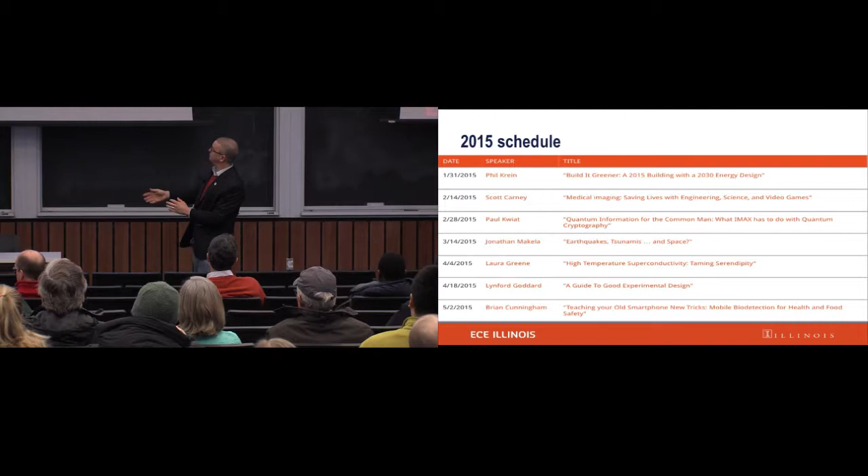we have a photonics or optics theme. This was intentional this year. 2015 is the UNESCO designated International Year of Light. It's a very exciting time for people like me who have made their careers working with various forms of light. It is also, I think, broadly an exciting time in science. It's the sesquicentennial of the publication of the paper that really first explained that light is very closely related to electricity and magnetism. And so it's a great year.

It's an exciting time. I think we've got an amazing slate of speakers, and I'd like to thank them first of all.

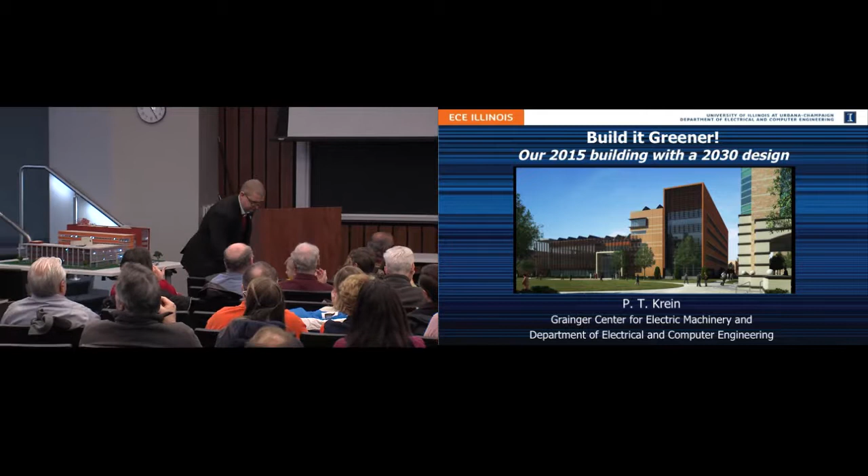All right, good morning. Welcome, everybody. I'm glad to see so many people here. He's taken away my things, but I wanted to tell you what was on those displays.

On the left one, we've been taking a snapshot every 15 minutes since January 1st, 2008 of this particular site. We have this tremendous time lapse, which probably I'm the only person who's not bored looking at. But it's fascinating to watch the holes get dug and all the things moved around, the steel going up, and all the rest of it.

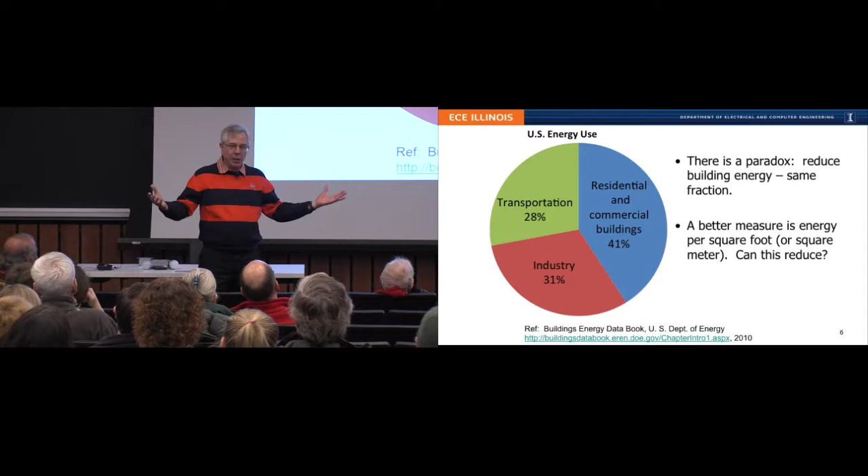What we want to do is make it smaller, right? We want to make the whole circle smaller, but we can't really mess with the fractions. So when people in Congress say, oh, 41% of energy goes to buildings, we have to do something. Well, whatever we do, it'll still be the same number. So we got to go after the right problem.

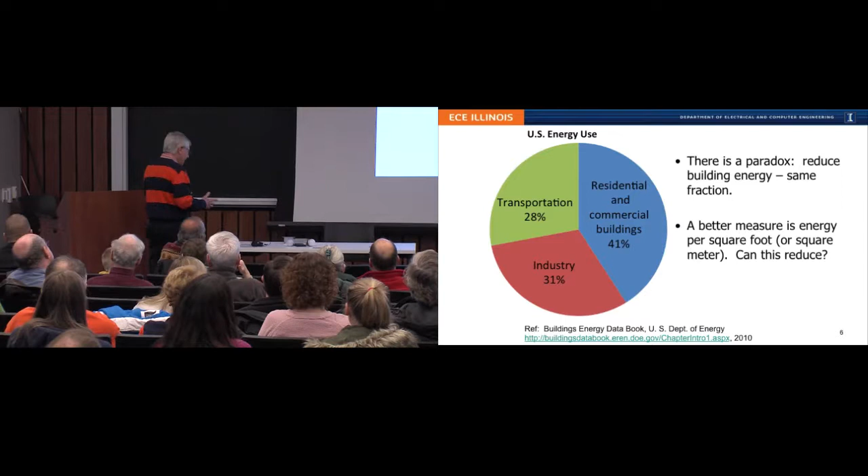The better measure is how much energy per square foot, or per square meter, does a building actually use? This building is spectacular, at least I think so. The data are still coming in, but it's looking very promising. Well, we think of buildings as things that architects do, and maybe construction companies.

What do engineers do in buildings? Well, first of all, engineers are the ones who have to make the choices about everything. I mean the engineers have to figure out how deep the hole gets dug, whether the dirt will actually hold up the building, how big the steel is going to be, and whether we can make that steel vertical enough that it'll stand up when we're done. They have to make sure that when the wind blows, the building doesn't tilt over, and so on.

They have to design it. They have to make sure it works. They have to make sure it'll be safe. Many times we have to test things if we're not quite sure, to make sure they really will work the right way. And on top of this, buildings have lots of codes and rules and regulations and safety stuff. That's all great. Now the construction people come and make the building.

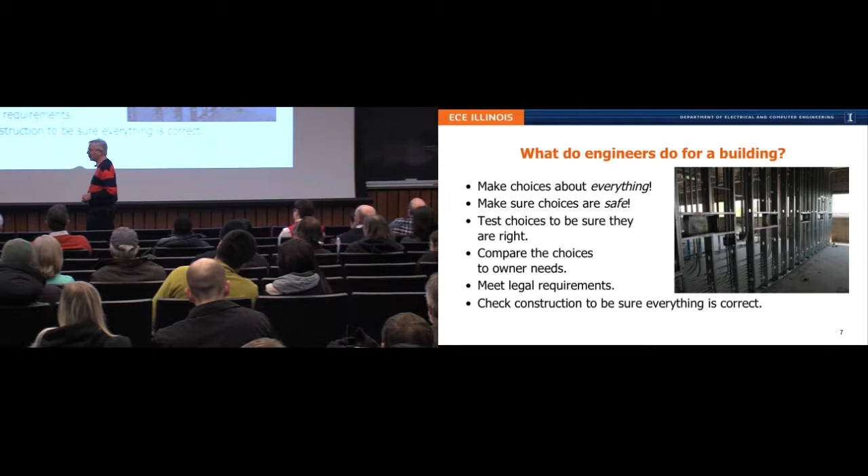The engineers and the architects too are responsible to make sure they do that right. This building is a great case in point. We had a wonderful design, and we said, boy, if they can just build it exactly as intended, it'll be great. Well, you know, 95% of the time that's true. The other 5% we're still working on, but it's okay. It's getting better all the time.

Now, one of the things that drives the things we do in low energy buildings is indeed related to students. Many years ago, the Department of Energy, pushed by a lot of people, said we want to have some sustainability goals. We really want to have buildings that use much less energy. And they put together something called the Solar Decathlon Challenge.

But anyway, their job was to figure out how to build houses, and those are sitting on the National Mall in Washington, D.C., that basically produce more energy than they consume.

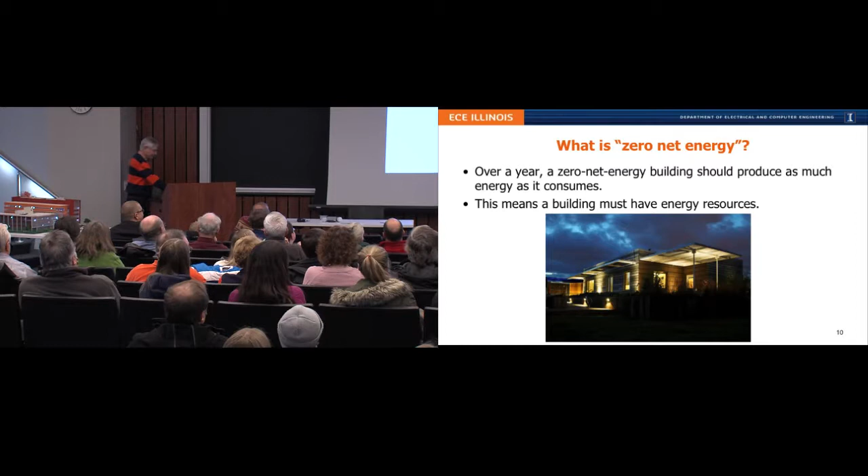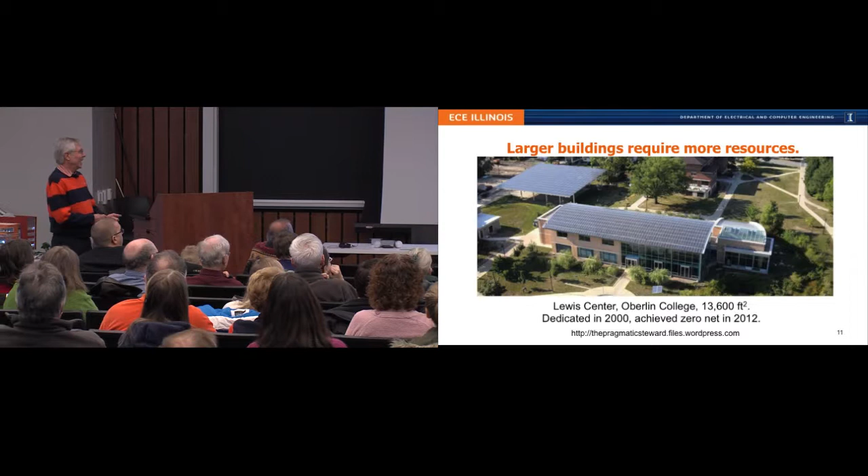Here is a building that does that. It's one of the first significant buildings in the United States that did it. It's in Oberlin, Ohio. Give you some perspective, right? 13,600 square feet. I know there's at least one residence in Champaign County that's that big. It's bigger than this room, not a lot, so it's not a really big building. And they put it together in 2000.

They talked about how wonderful it was and how little energy it used. Took them until 2012 to actually get to net zero energy. And if you look closely, you'll notice that what they had to do was cover the whole thing with solar panels and cover this parking lot with solar panels, and there's a little bit of other stuff in there you can't see. So it gives us some perspective on how these things really work. By the way, this building behind it is just a big house, so it gives you, again, some scale on how big that building is.

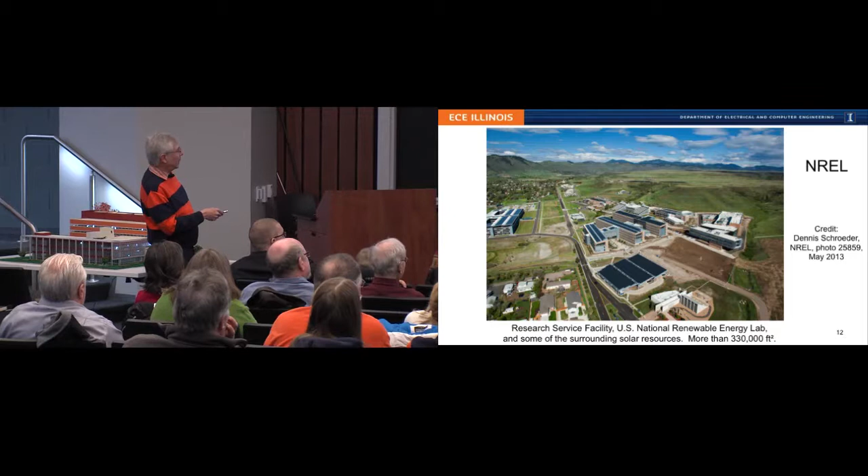And it is zero net energy. Well, because this parking lot's covered with solar, and this parking lot's covered with solar, and this building's covered very densely with solar. Yeah, that's what you have to do to make it work. It's okay, right? It generates more energy than it consumes. So that building is tremendous in terms of its energy capability. If you're ever out there, go visit it. But this is hard, okay? It's not easy to do this.

Why? Okay, first thing everybody wants to know is, well, how much is that going to cost me? I want a low energy building. What are you going to charge me for that? And given that I do that, how much is it going to cost to actually run the thing? Is it going to be more expensive to operate because it's got complicated things in it? The biggest problem in the United States is that most large buildings aren't owned by the people who actually use it and live in it. So why should the landlord spend lots of money on a fancy energy building when they're not paying the energy bill? The tenant's paying the energy bill.

So, you know, what's in it for me as the building owner? Now in some parts of the country, certain places in California, I can command a premium rent because I've got a low energy building and it works better. That's okay. Illinois, well, not so much, right? And even here, we've got lots of houses that are just leased as well. Actually, I'm pretty impressed with these people. They re-sided their house and really fixed it up. So that owner clearly cares.

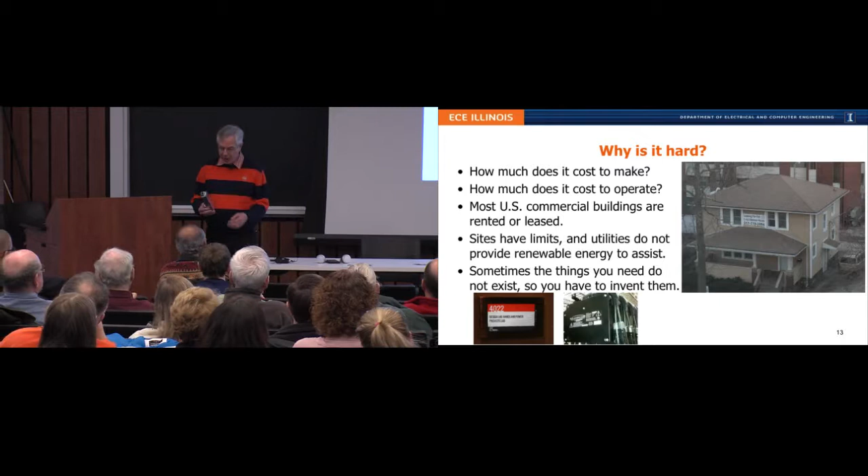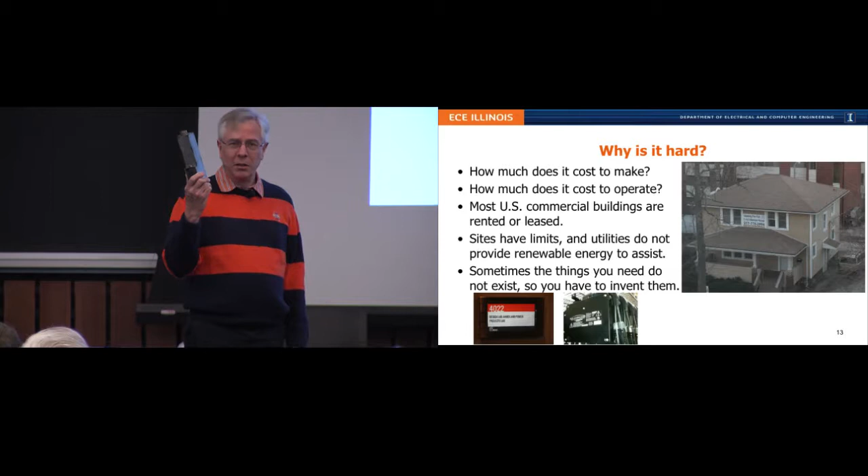Bigger problem, right? Sometimes the things you need don't exist, you have to invent them. Not everything we invent is a fancy app or some wonderful, complicated computer. A lot of them are pretty mundane. For example, our contractor said, well, we can't figure out how to make the electrical work in this particular kind of wall. And I said, why don't we just build a box that'll work? Oh, we can do that? Okay. Turned out nobody had done this before, so we have a patent on it. Sounds kind of silly, but it's true.

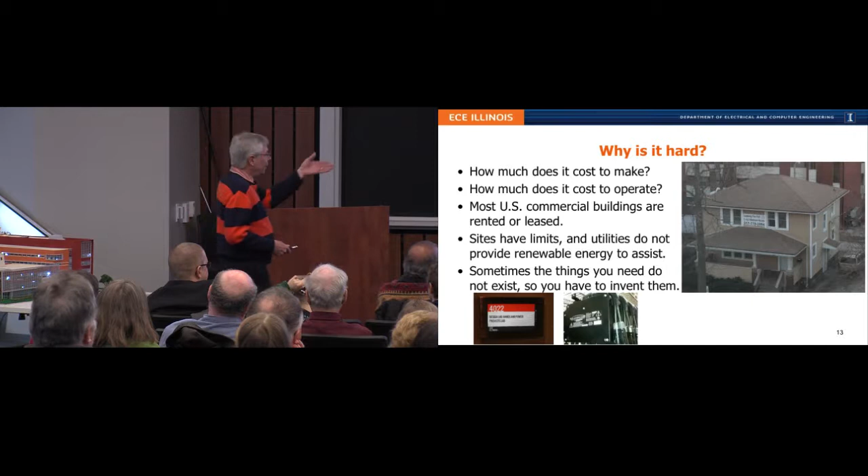See that thing down in the lower left here? Maybe you noticed that display as you walked in the door. Turns out those didn't exist either, so we had to invent them. We didn't invent the software, somebody has that already, but we invented the way to mount it on the wall, the box to set it up in, the fact that it's really secure. Three graduate students with a crowbar would probably spend three hours trying to rip it off there. They would eventually do it, but it would take a while.

And we also had to invent these devices that will convert solar energy, which will be used on the building here pretty soon in the next few weeks as they start installing that. So, you know, if the right answers really aren't there, you invent the right answer.

Now, one of the biggest problems is that almost all big buildings are unique projects. They're what engineers call a one-off, meaning I do it one time and then I never do it again. And the real problem is, what can I learn from that? How do I learn something that I can apply to the next project?

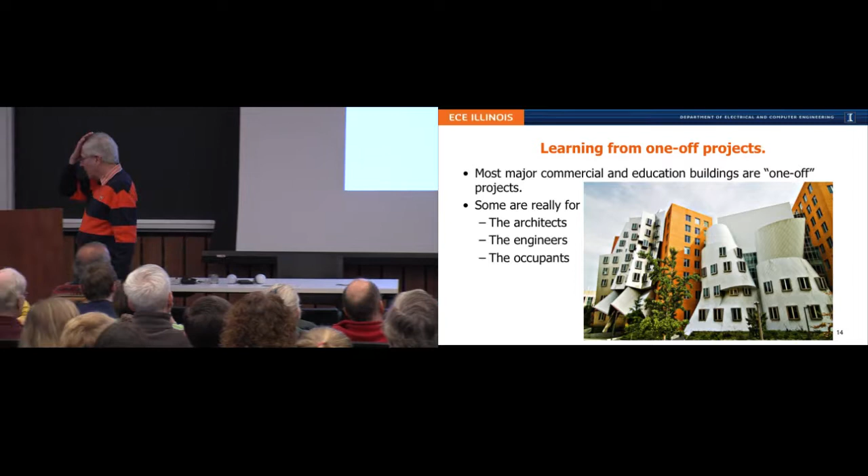Unfortunately, some of the building designs are really not for the people who live in them. They're for somebody else. There's a very famous building that obviously was built for the architect. I've been in that building. Most of the people who live and work in that building hate it. The lawyers love it because the lawsuits about the leaks are still going on. But everybody in Boston knows that building. The publicity value is incredible, right? So the pain to the occupants traded off against the benefits to the owner, it's very weird, okay? It's very weird.

Right? This building was built for engineers. This is that same building at the National Renewable Energy Lab, different view. And it is zero net energy, right? Built by and for, really, engineers. The architects got mixed up in there someplace, but the engineers vetoed a lot of the stuff. So there we go.

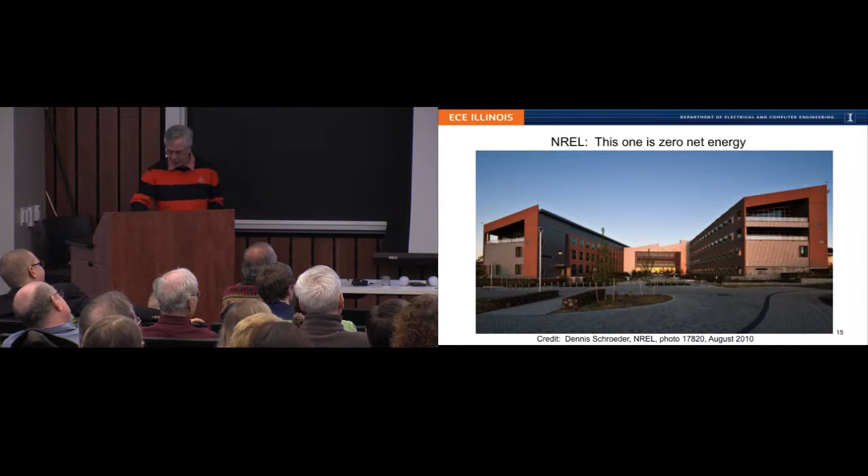This one's gorgeous. It was certainly built by and for the architect. This is a Frank Gehry design, if nobody's ever seen it. The engineers hate it. It took so much work to get that thing to hold itself together. And even with what they've done, it still tends to kind of fall apart. The occupants love it. It's a wonderful place. The architects, of course, were very impressed. And everything else, it's won huge numbers of awards, but eventually it will fall down.

Okay, we talked about build it bigger. Some of you know what this building is. Anybody know what this building is? That's the Merchandise Mart in Chicago. When it was built in 1930, it was the biggest building in the world. You know what building superseded it? The Pentagon, 13 years later.

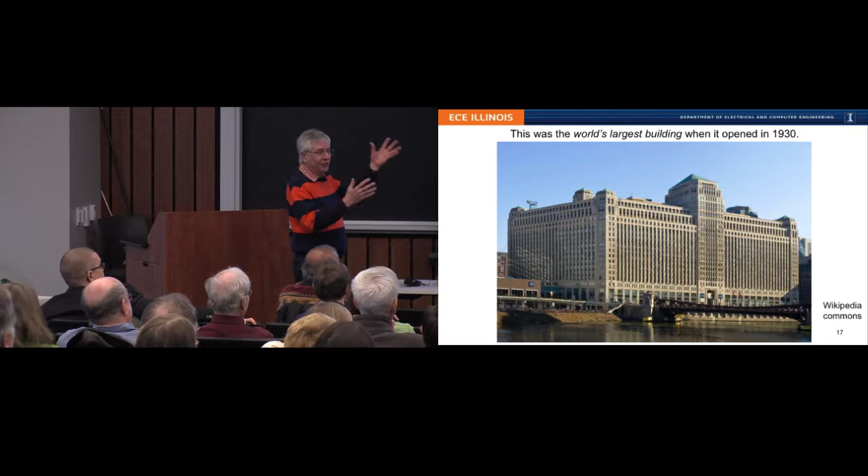Okay? It's still a huge building, obviously. It hasn't changed. It was built for the owner, which at the time was Marshall Field's. They wanted to use it as a huge wholesale warehouse. We don't do things quite that way anymore, but boy, it was tremendous for that function, and even today, it's an enormous wholesale shopping mall.

It's quite a facility, and they've been trying to figure out how do we rework this building so the energy consumption goes down. Huge building. But as a big boxy building, actually the energy consumption is not that bad. And of course, we have lots of nice buildings here on campus, but any building involves compromises. Right? And certainly if I'm trying to achieve low energy, I'm trying to trade off cost, I'm trying to trade off known technologies that I'm pretty sure are going to work for a long time. I try to trade off other things.

For example, this building, one of the requirements for the architect is you shall design a 100-year building. Now to people from Europe that just sounds stupid. But here, what does that mean? It basically means this building has to function without any major renovation or updates for a full century. Other commercial buildings in the United States do not meet that requirement. Nobody would put up a building and not expect to do kind of a significant overhaul every 20 or 30 or 40 years. So, people say, oh, it costs more initially. Well, yeah, but over 100 years, it's going to cost a whole lot less.

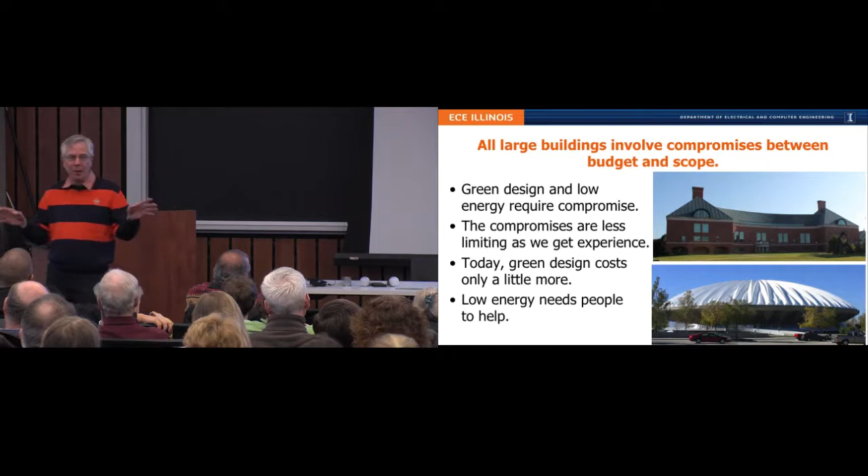One of the things I want to emphasize, though, is that low energy really involves people interaction. And I don't just mean bands of roving people running around turning lights off, although that's a good thing after hours. I also mean how do we behave, how do we live and work?

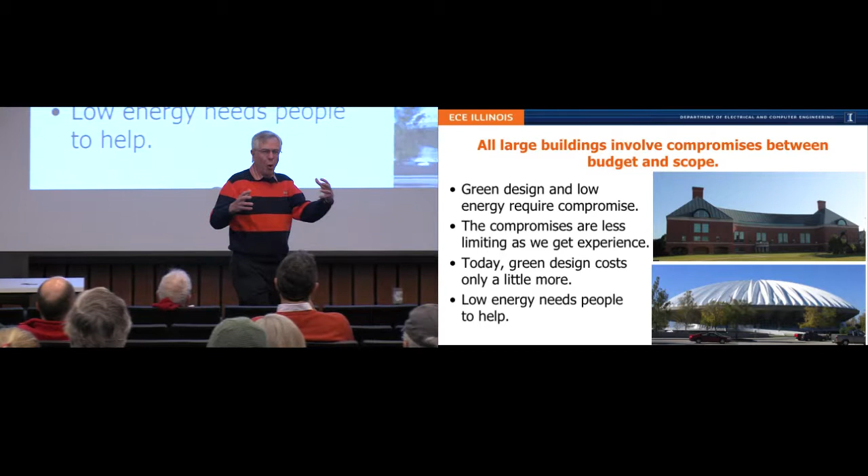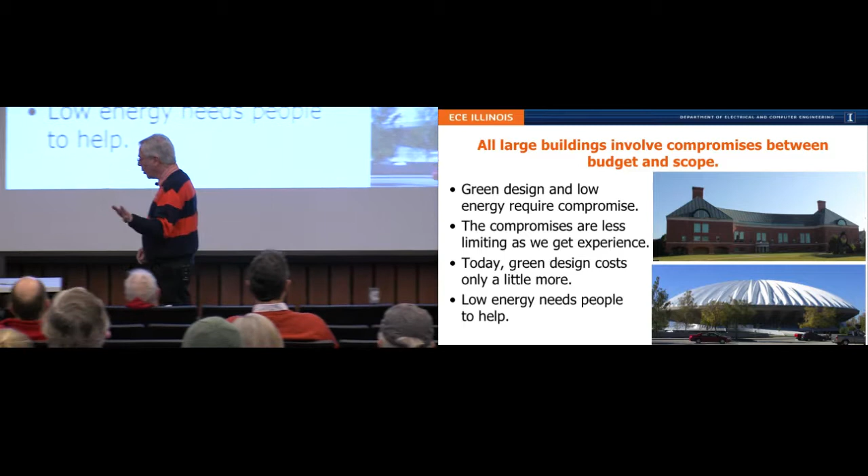Those of you who are college students know about those little dormitory-sized refrigerators. Those things are horrible, they use as much energy as a full-size kitchen refrigerator. Really convenient, sure, but what we had to do in this building is have a bunch of little kitchenettes with one big refrigerator, so we can tell the 30 people who try to walk in with little ones, no, leave that behind, use this one instead. And you know what happens? They say, well, who's going to clean it? And I ask, well, who was cleaning your little one? Nobody. Okay, guess what.

All these things are very much linked to scale. It turns out that in a house, you run the numbers and find out, yes, I can put enough solar panels on a house to supply its energy needs, at least on average. Can't do it at night, but details — that house is covered on the south side with panels.

This is another solar decathlon house built by our students, in the parking lot at the iHotel. Has anybody seen it? Go look at it, walk around — very cool, but there are compromises. Really thick walls, so there's not much space inside, but it's good space. Special, really low energy appliances, that's nice and fancy. Very simple roof lines, not fancy architecture. In fact, people who saw it in Washington said the architecture's horrible. Yeah, but it produces 30% more energy than it uses. Whatever — compromises, right?

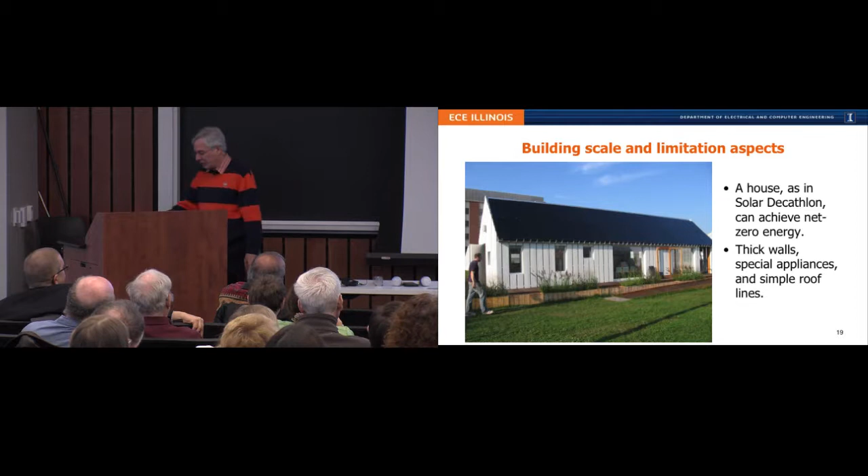So you can't really do this in big buildings, there isn't enough roof space. But you can with these really big flat buildings. Walmart has been putting solar in a lot of their installations, anywhere energy is relatively expensive — cover the roof with solar. Great thing for them, they're saving money, not doing it just to be nice. Some of the other big box stores we're all used to could do the same thing.

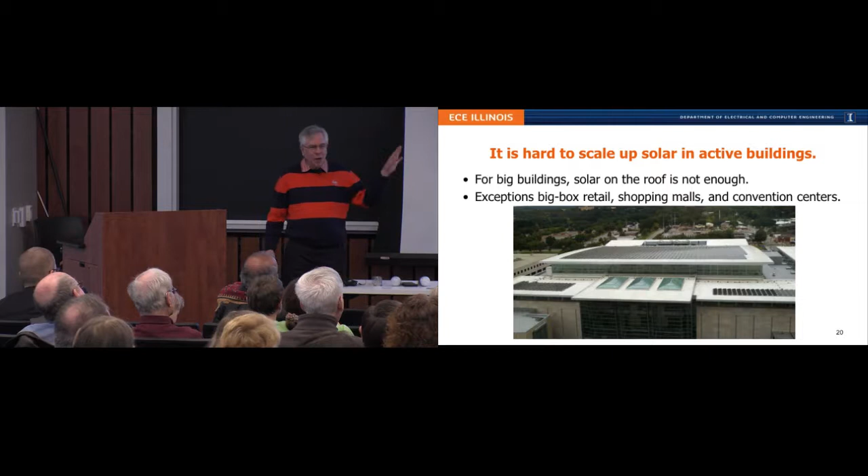This is the convention center in Raleigh, North Carolina, completely covered with solar. It covers most of that building's energy needs. It's not zero net, but it could be someday.

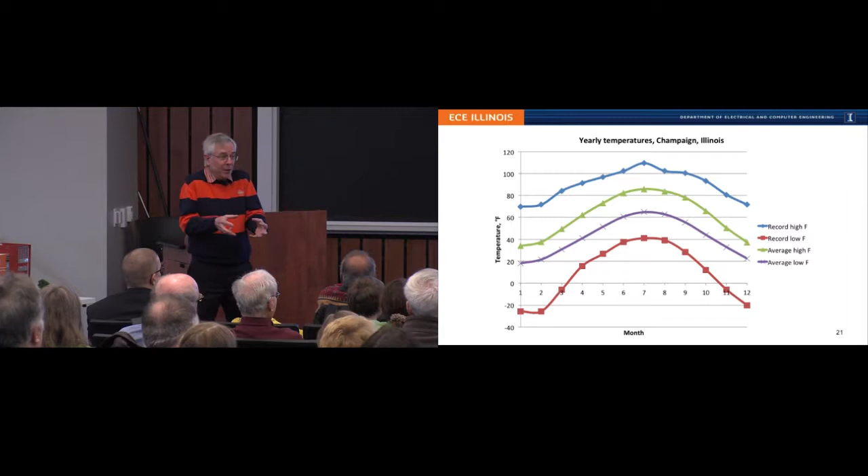Now, when I design a building, it depends on where it is. We live in central Illinois, and we have a climate I like to call all-in. When I show this to people in Europe, they're blown away, because they don't have these extremes — and we have extremes on individual days too. We see what it does to pavement, it rips the pavement apart. So what in the heck is it going to do to a building? You've got to design a building to be safe and effective over this whole range.

You've got to handle all the rainfall, handle all the snowfall. If snow falls on the roof, you don't want the roof to collapse. Those are fairly easy ones. The nasty ones are things like this — you've been here on days when it's changed 20 degrees in an hour. That's what rips the pavement apart, especially when it goes through freezing and back again. That's horrible.

And where does the water go? Well, it goes where it wants to. Somebody visiting here from Purdue asked, how come you guys don't have tunnels so you can walk between buildings in the winter? I said, yeah, that's great, but they're wonderful water pipes — when it rains hard, they're not tunnels anymore. We don't like that. We do have some tunnels, but they have to be very carefully planned.

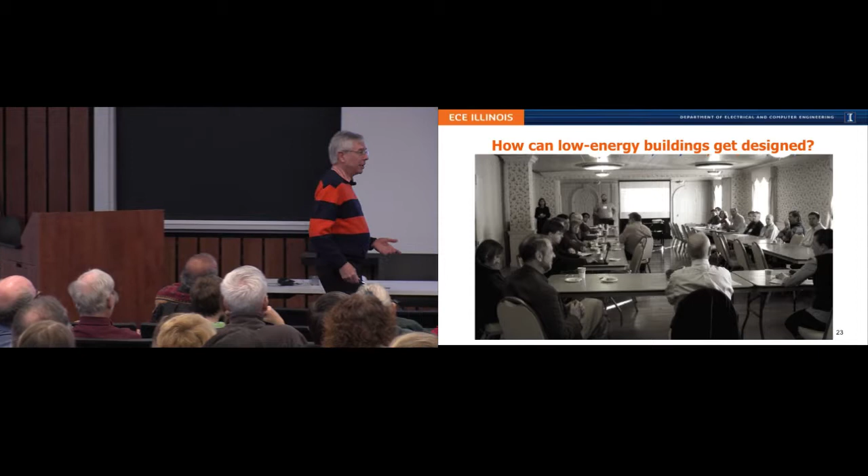So how do you do this? I can't do it by myself, the architects can't do it by themselves — you've got to have a great big team. A couple of people in this room are probably in this photograph. When we started trying to figure out how to do a low energy building, we got lots of people together and said, everybody take your favorite thing and put it down, let's take a look, and then we have to evaluate which ideas make sense. Because you can't do everything, and some things are in conflict, as we'll see later.

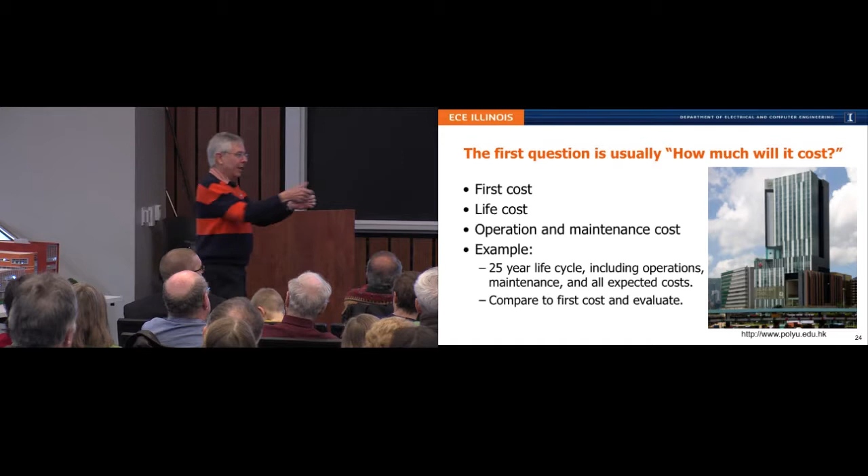The coolest thing about it is on the first floor they have a whole wall, a vegetation wall. I don't think it's working quite the way they thought it would. The idea is the guys who work in the restaurant are supposed to come out and clip off herbs and put them in a salad. What really happens is that the mister that keeps it watered gets water all over the people trying to sit at the tables below it. So they're trying to figure out how to do that and not have it raining all over the customers.

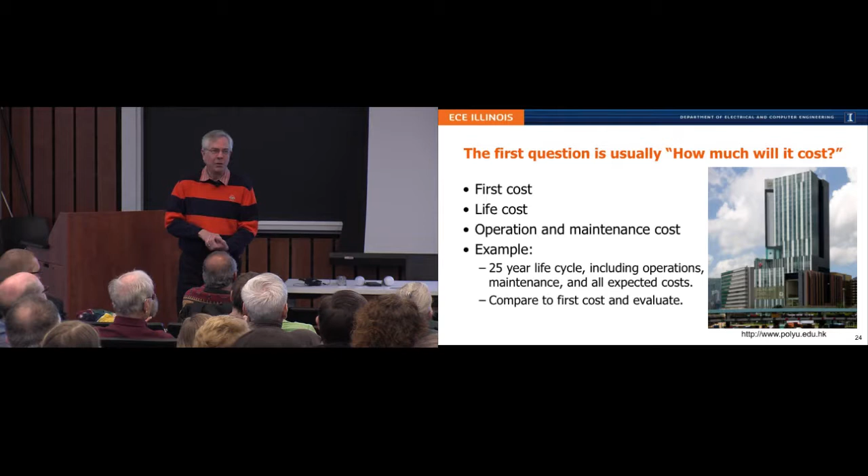Details. So how much does it cost up front? But that's only part of it, right? How much will it save over the life of the building? If I put in more money to get the energy lower, will that save me money in the long run? And how do I put those things together?

So for example, in this building, we did everything on a 25-year scale, not a 100-year scale. We're not quite that good at it. But we tried to figure out how this works over a long period of time so you can decide what you're willing to pay for or not.

Now, engineers, of course, this is what they're used to. The design engineering team should know everything about everything in this building. But in addition, they use physical and computer models to try and predict things, to understand things, and to better evaluate what's going to happen.

For example, there's something called the EnergyPlus model that the National Renewable Energy Lab has available. Very comprehensive. It does things like try to figure out the energy use over a day by counting how many times doors and windows open or shut, where the sun is, how sunny the climate is, how much heat comes in on the roof because of the sun, and what kinds of things happen in this building, what are the typical energy uses we might expect.

As you can imagine, that can get really, really complicated, and frankly not terribly accurate, because every building's different. So it's very hard to make that work. We end up with some physical models too, like the one over here, trying to understand better what's going to happen.

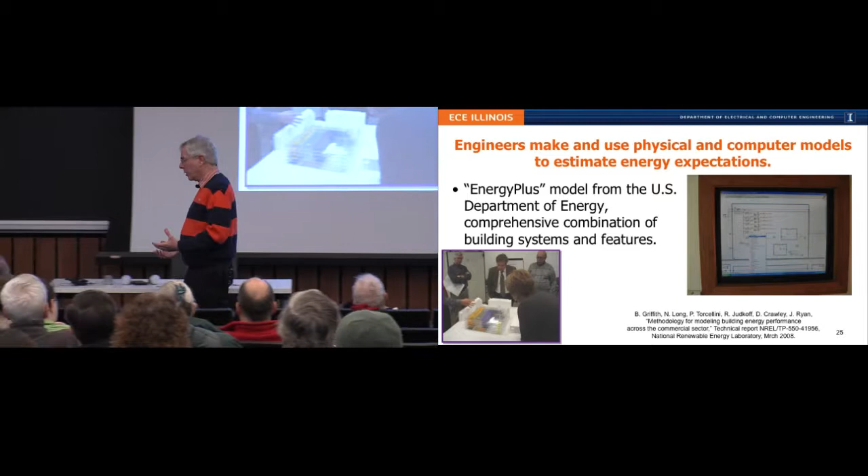For example, our engineering architect firm said, well, we don't think you're going to get that close to your zero net energy result, because we think your energy usage is going to be this. I'll put up numbers later.

And I said, well, I have my own models. I'm sneakier than they are, and my models are simpler than theirs. And I said, no, we're okay, it's good, just go with it. So far my models are working, theirs are not. Let's see if that holds up in another 3 months. Typically that works great for a few weeks, but whatever.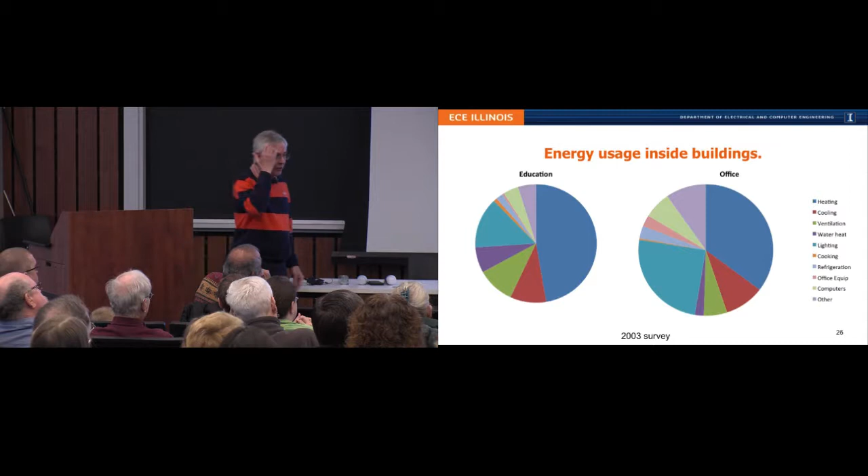In fact, some of the kinds of things we use to build these models relate to what people do in a building, what they use energy for. I don't know whether you can tell all the colors, but the big thing is heating. The next biggest thing is cooling. We do them both at the same time sometimes, at least on the same day. Ventilation is very important too, it takes a lot of energy. You have to turn over the air in the building or it gets really uncomfortable.

There's a little sliver there for water heat, and the next one is lighting. So the big ones are heating, ventilation, air conditioning, and lighting. The other things fall off from there. There's another relatively big one in there, and that's computers.

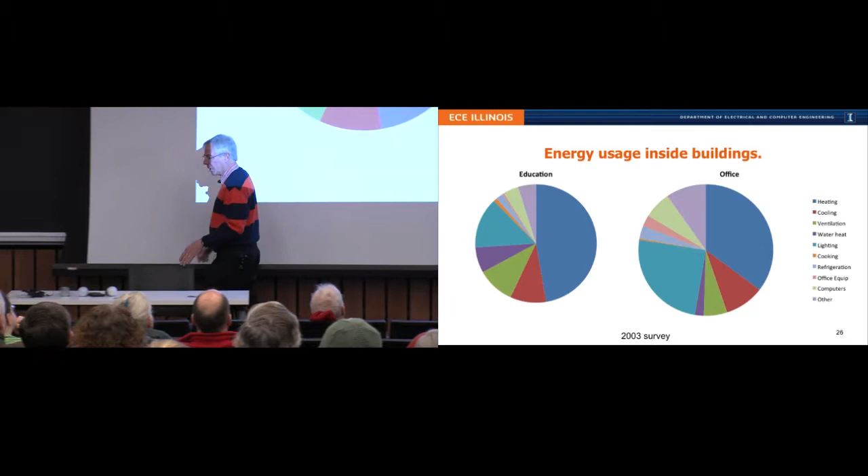By the way, I tried to scale these. An educational type building typically uses less energy than an office building of the same size. So heating, ventilation, air conditioning, and lighting dominate, but office equipment is catching up. Computers are catching up, they use a fair amount of energy.

The biggest problem that we have in a building is it doesn't matter. The other thing I had on the other screen this morning when you came in is an image from an infrared camera. We use that in the lab to see things that are hot or not. When you walk around an office, what do you find? Well, here's a copier. That uses as much energy over the course of a day as an oven.

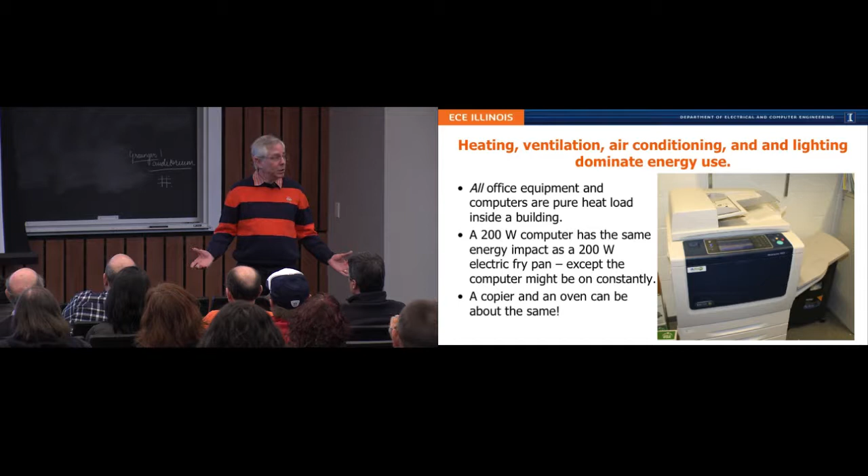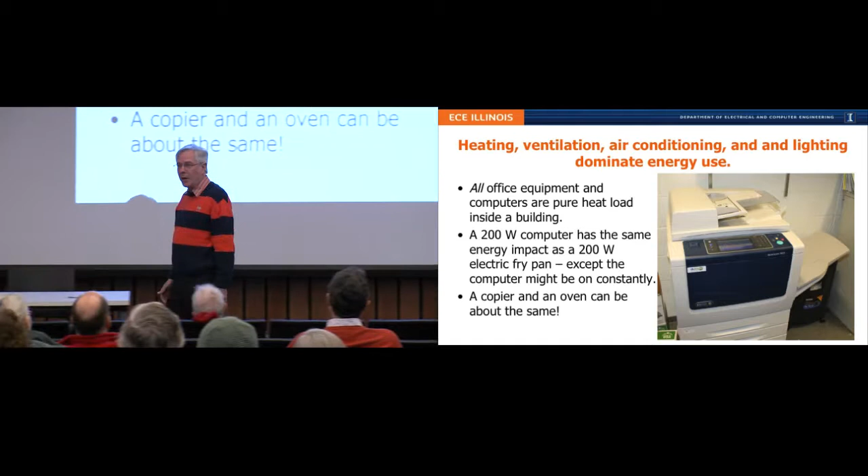It does, okay? And I had somebody complaining about somebody wanting to bring a toaster into this kitchen. That's a horrible energy hog. Well, how many minutes a day is it used? Well, I don't know, 10, 15. Okay, the fax machine sitting next to it, which isn't using as much energy, is on all the time. Guess which one is generating more heat? It's not the toaster. So yeah, the 200-watt computer on my desk is having more energy impact than a 200-watt electric frying pan, because it's on all the time. And from the building's perspective, it doesn't matter, it's all heat.

And I've got to either pump it out in the summer, or maybe in the winter I can take advantage of it and not run the other heating so much, right? So it's weird, right? In the end, everything's a heater.

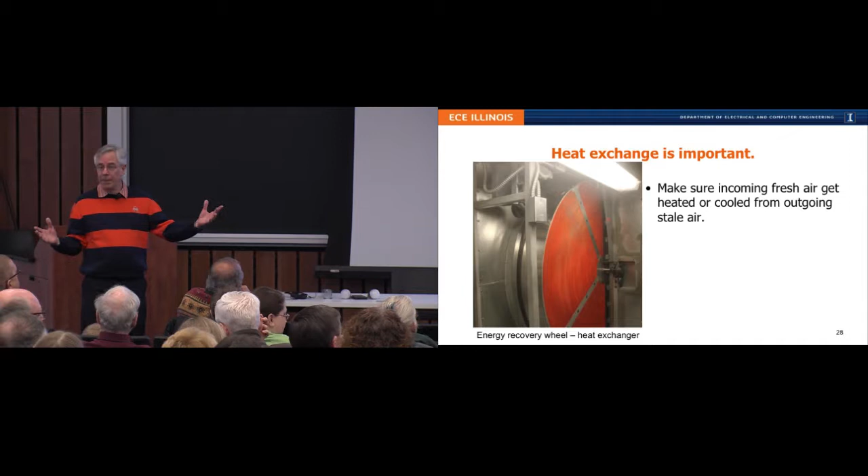And one of the things that means is we spend lots of energy, lots of money in the winter heating up the air that comes into this building, and lots of money and energy in the summer cooling off the air that comes into this building. But you also have to refresh the air constantly, okay? You don't want to keep that cycle going, it'll just blow you away. So the incoming fresh air has got to exchange heat with whatever's going out, so you don't have to fight with that all the time.

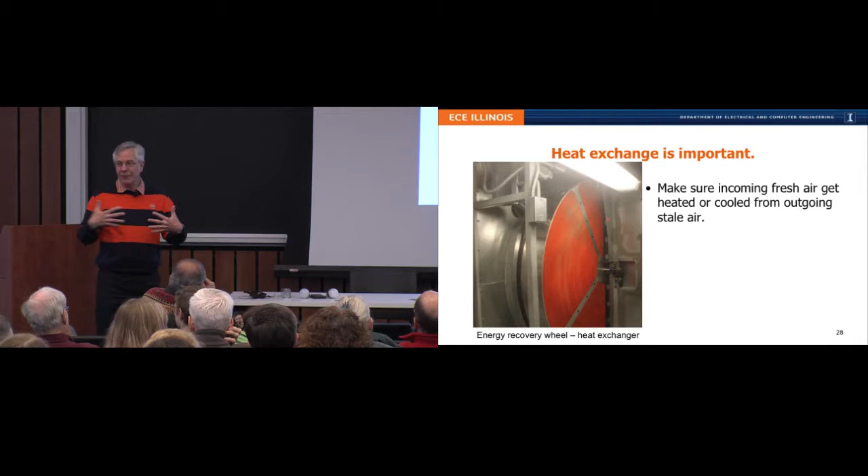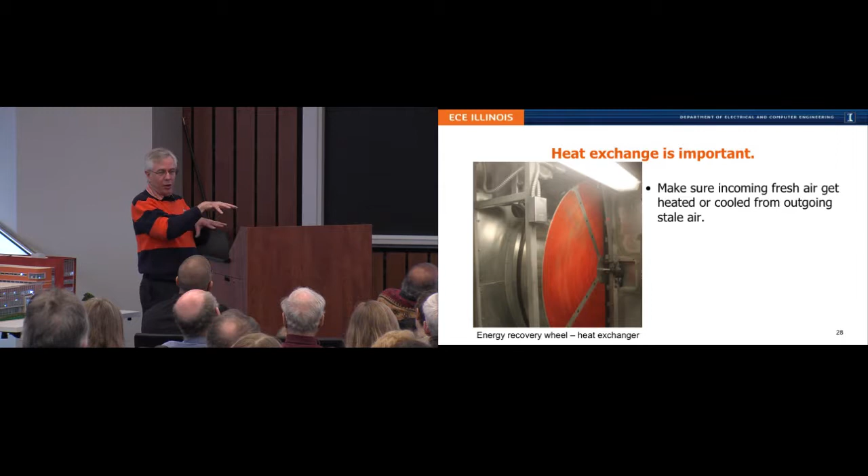So we have these huge things called energy recovery wheels. There's a bunch of them right below us, and a whole bunch more up on the top tower. The fresh air comes in, the stale air goes out, they cross over each other without mixing, and they're supposed to exchange energy, which saves a lot. That's a huge benefit, but it's complicated.

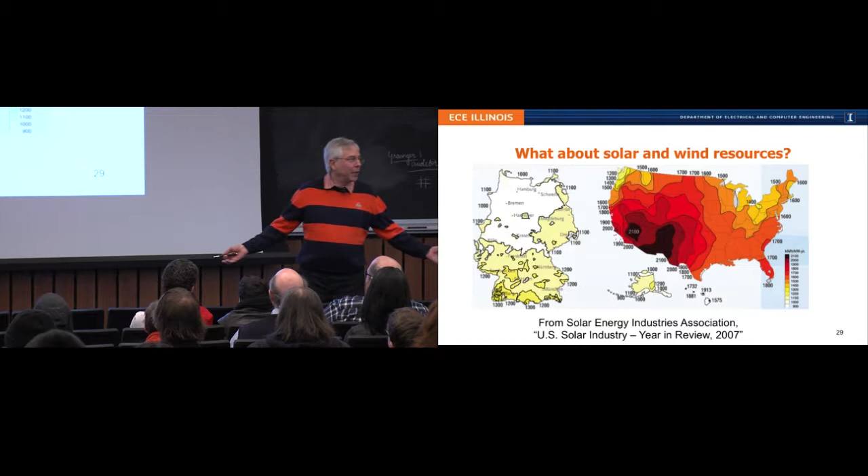That's not Seattle, it's the Olympic Peninsula. I've been up there enough that you can stand in Seattle, and maybe 4 days a year you can see out to the mountains on the Olympic Peninsula. The other one, right here, that's Cleveland. I'm from Cleveland, so I know what that's like. We didn't have any sun for 3 weeks in December. Took me 2 weeks to notice, because I'm from Cleveland.

You know, even here, Central Illinois, it's not close. There's plenty of solar energy around, all we have to do is gather it up. So this is actually good news, right? There's a lot of solar resources in the United States that we should take advantage of.

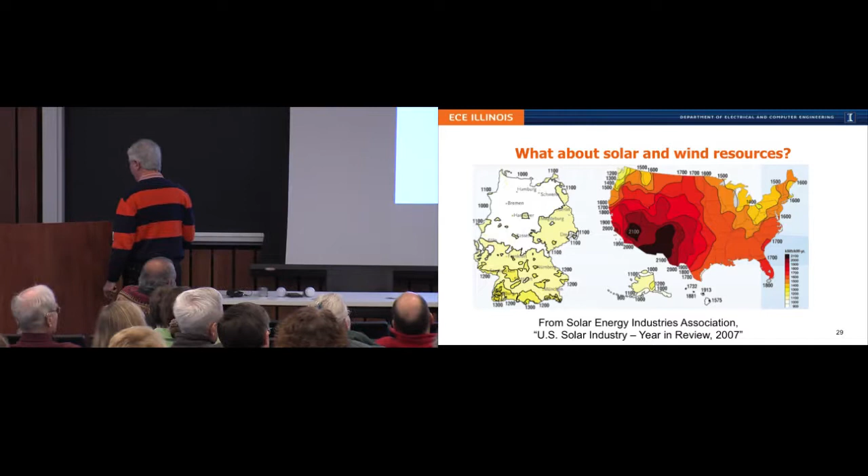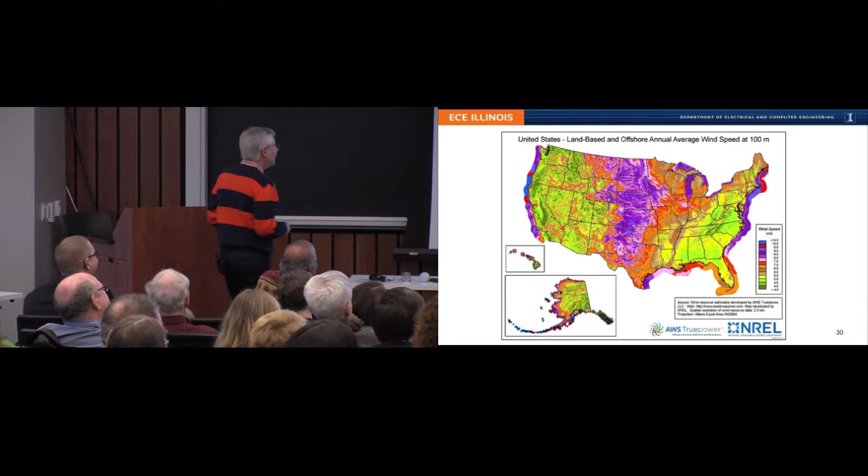Well, you know, we could get off the coast. Ask anybody you know who's spending time in Martha's Vineyard about that—I'm not going to talk about it. So wind is actually very hard to get to.

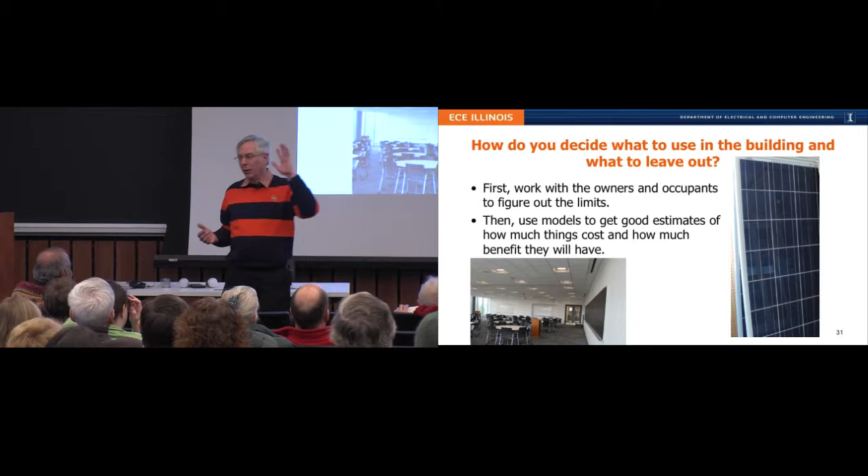So now we've got to decide, right? We've looked at these alternatives—what do I put in the building, what do I leave out, how do I decide? First thing is I've got to figure out what the limits are. What can I get away with? What are people willing to consider, what are they willing to invest in, what are the trade-offs? Then I want to use my models to see how close I can get in. How much will this cost, and how much will it benefit me over, you know, 25 years, 100 years, hour and a half, whatever, right? How do I figure out all that stuff and get that into place?

Let me do a couple specifically. One is our cooling system. We use what's called a chilled beam. You can't see it in here, but you can out in this hallway. It basically looks like a light up in the ceiling, but it's not. What we do to cool the building is pump cold water through in the summer. It's much more efficient to pump water than to pump air, so instead of cooling air and pumping cold air around, we pump cold water around. Saves a lot of energy, and it actually works pretty well.

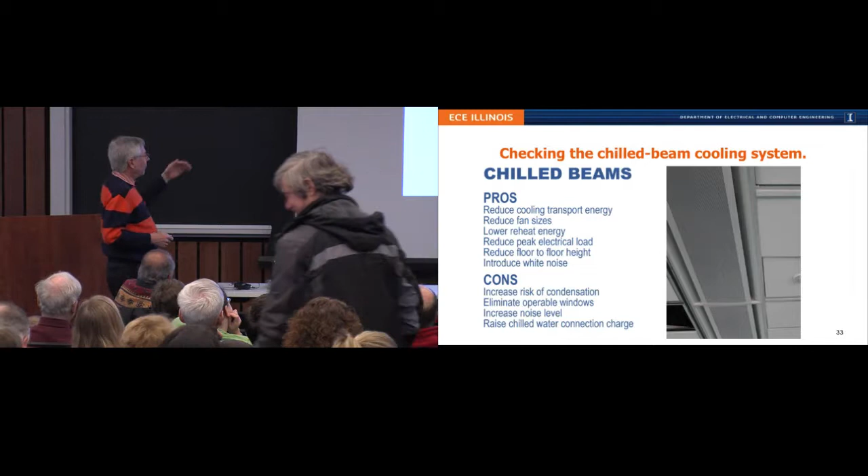There is a risk, and it's a big one. If somehow somebody leaves windows and doors open and the humidity goes up too much, those things will rain, they'll condense water. It's great in a lab, let me tell you. We don't have that much insurance. So it meant that if we did that, nobody can open the windows, we have to have fixed windows. That's a bit of a painful trade-off, but we had to look at that. What's going to give us the best result?

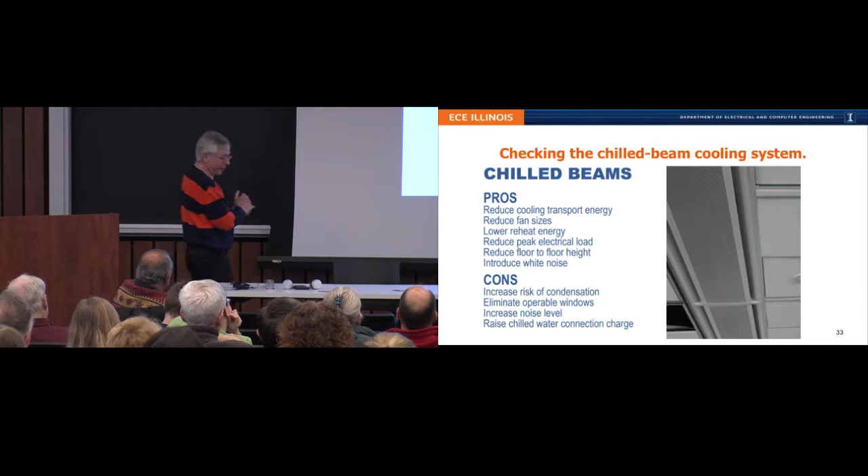So, lots of trade-offs. We didn't do that in this building because the campus already has this tremendous cold water loop all the way around, and it amounts to the same thing. It's at a constant 55 degrees, so hey, that's good.

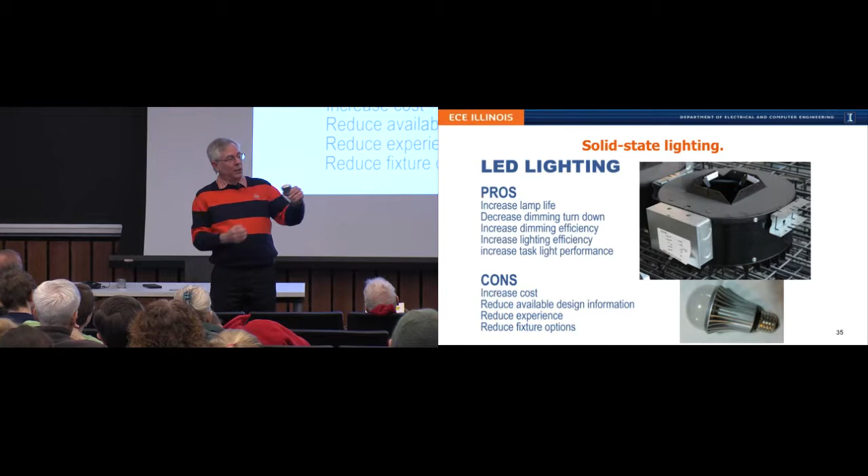Solid state lights, these are so cool, right? The lights you're seeing here are fluorescent, high-grade fluorescent. The lights up here in the front that are off are all LED based. You've seen these in the stores. I got two of them, I'm going to pass them around. You can take the cover off and see these little LEDs in there and a lot of electronics to make them work. Much more efficient, much more efficient. More expensive too.

Let's see if this one comes off. Oh yeah, you can work on it. Don't worry about breaking it, it's okay.

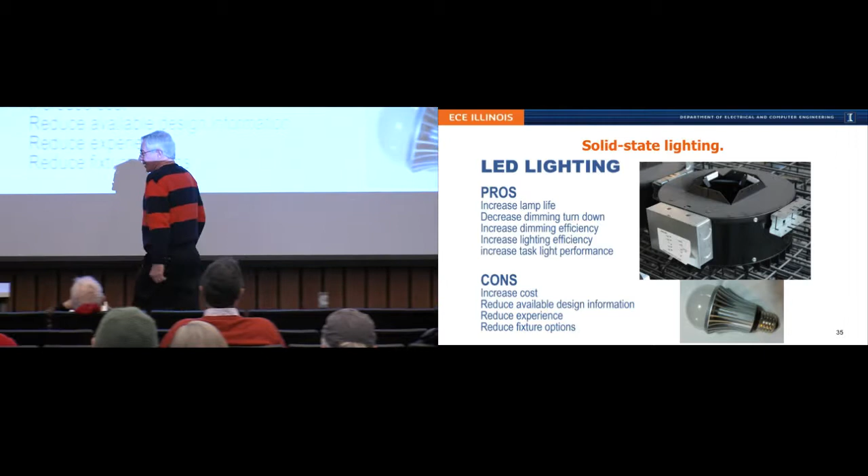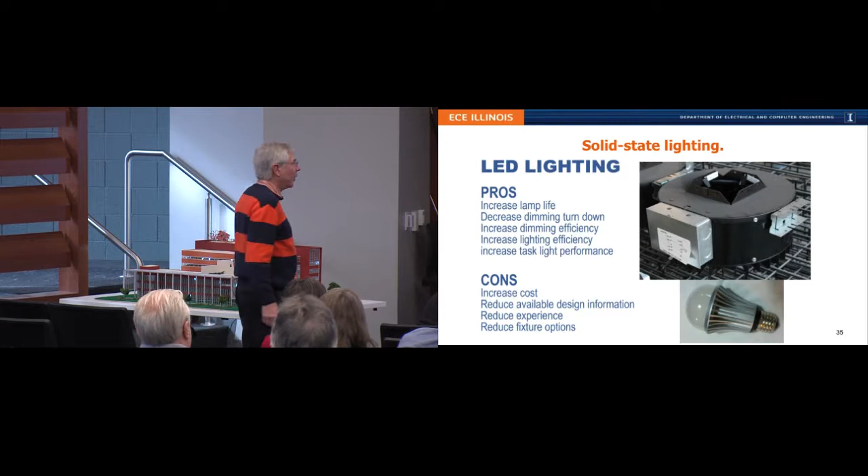The biggest problem with this is when we designed this building, these products weren't ready. They said, well, you can try this, but they don't exist. Well, we had faith, we're engineers. In fact, the inventor of the visible LED is one of our faculty members, so we said we've got to have LEDs, doesn't matter, they'll be ready. They were, so it's good, it's all good. Building's full of LED lighting, except in places where it's not.

Okay, wind. Everybody asks, what about wind on this building? We're in a good location, it's not that bad anyway. Architects showed us these gorgeous, beautiful artistic renderings of wonderful looking things that could go on the building. Wow, that's really nice. And I said, wait a minute, remember, I'm a skeptic, right? I want a photograph, I don't want this artist drawing. I want a photograph. There's the photograph. And everybody looked at that and said, no, we don't want that on our building. No, no, no, no, no.

And to put that in real perspective, we also did the structural analysis: how much extra steel do you have to hold that up and to keep it from making the whole building shake?

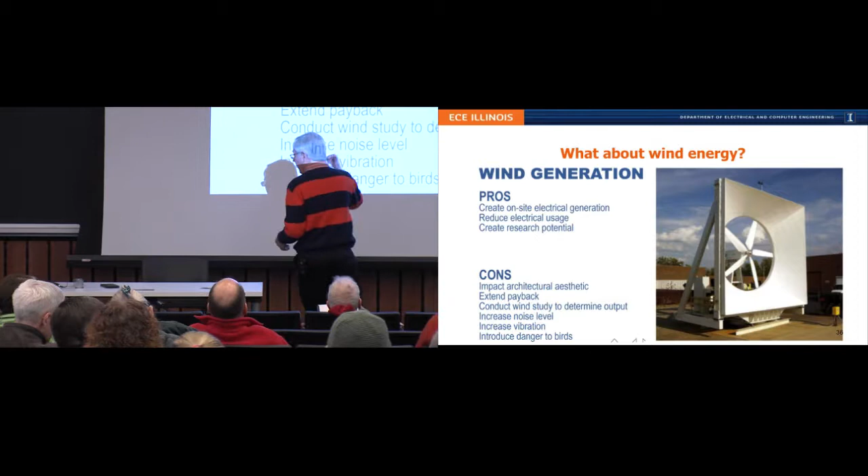And after we did that math, no—there's no wind on this building. Someday we'll probably have wind on the parking garage across the way, where it doesn't matter, but not here.

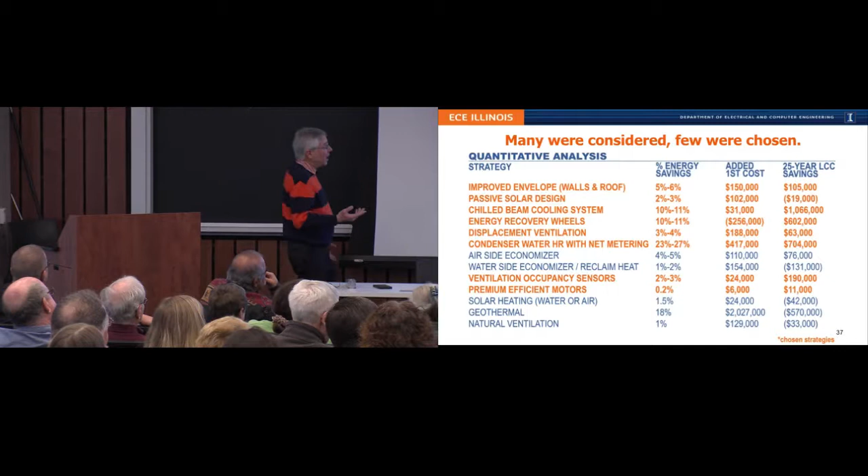I don't want to run you through this in detail, maybe I should have left it out. Anyway, lots of things were considered. Many were considered, few were chosen. The things in orange are what we ended up with for many different reasons, but everything had to go through these hurdles. Some were eliminated because they were too expensive, some were not. Lots of trade-offs, lots and lots of trade-offs. This is one page out of about 15, to give you some perspective.

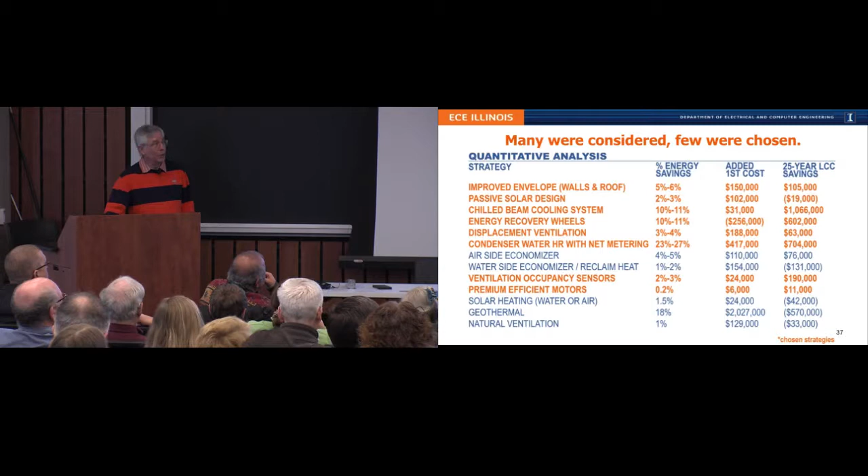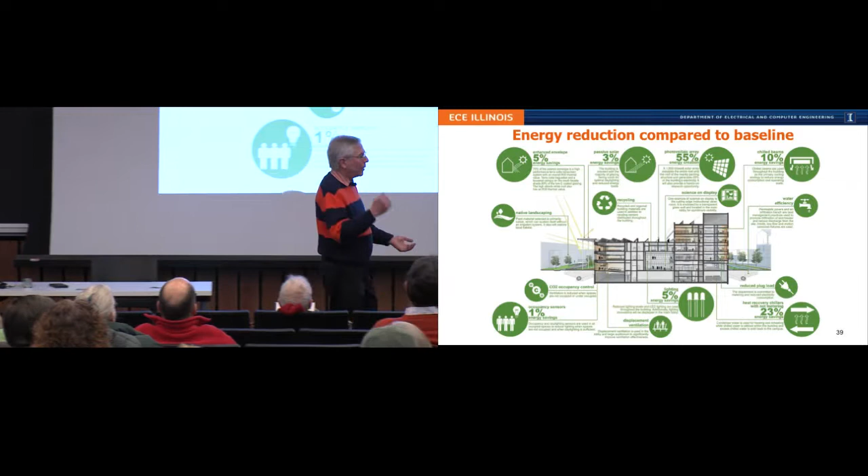Overall, then, you end up comparing to industry baselines. It's really easy to go in a room and say, oh, I'm going to use 20% less, 30% less—less than what? It's just like going into a store where they say, oh, this is 30% off. 30% off of what? I guarantee it isn't off the price it had yesterday. We all know this, right?

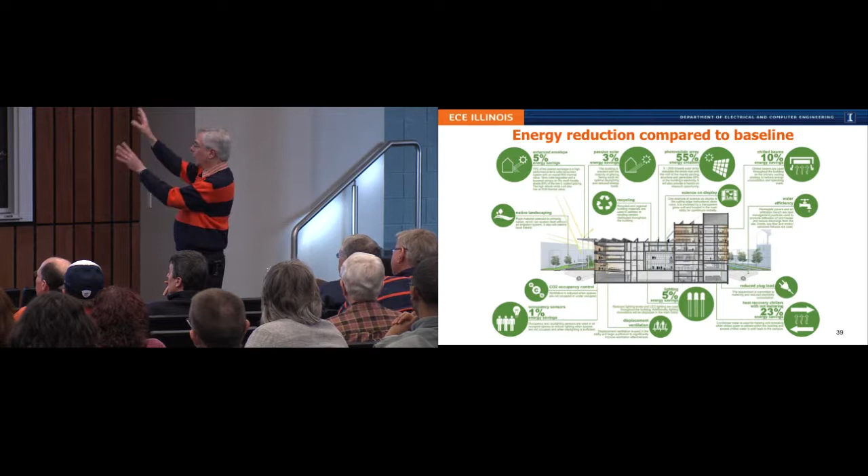So, compared to what? There's an agreed-upon baseline that says here's what we use for comparison. We set that up, run all the numbers, and if you add those up quickly, they do add up to more than 100%, as they'd have to, to get to zero net energy. You've got to get to 100%.

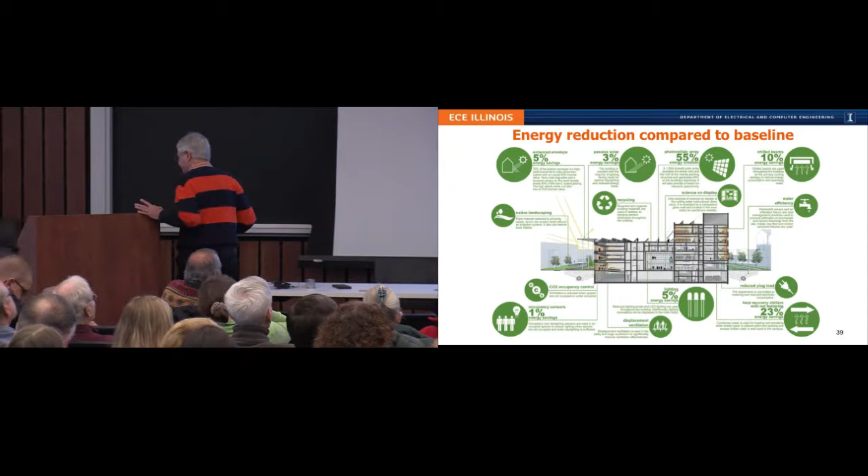Rooftops are great places to put solar power—what else are you going to do on the roof? In fact, you also capture sunlight that otherwise would just make the building hotter. So in the summer, solar is great—it does two things: it gathers energy and it shades the building.

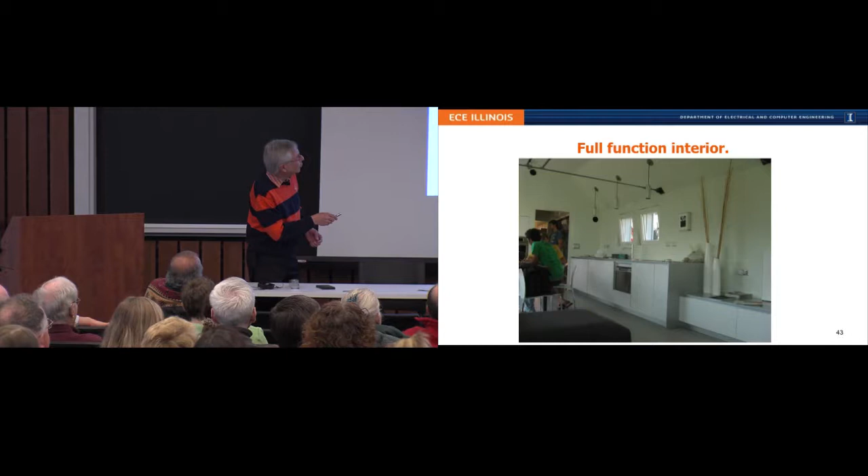Now, I showed you that one house from the other side with the solar panels. Here it is from the north view again, down by the I Hotel. So, building a house that's zero net is physically possible, and it's got lots of nice, cool stuff on the interior. I don't know if you can tell from that image how thick the walls are—they're really thick, so it's got special windows for all that.

The bathroom is very weird—the shower is kind of right in the middle, and the theory is that the water just runs down through the floor and drains away. It's kind of a pain to clean up when you're done, though. But that living room is really nice. So it's a cool place.

Here's that building in Colorado again, zero net energy. Again, it's more for engineers, so there's lots of cubicles in it and stuff, but it's got some interesting features. For example, the glass in that building automatically changes color, so that when the sun hits the windows, they turn dark. And the question you always ask is, well, how long will that hold up? That stuff typically wears out. They said it's going to last 30 years. This building's got to last 100, so we can't do that. Oh well.

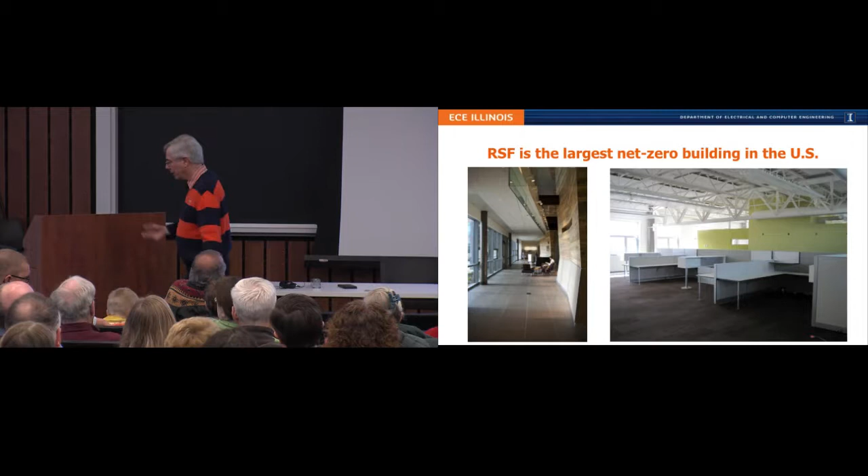It achieved something called LEED Platinum certification. What that means is leadership in energy and environmental design, something like that. The highest level is Platinum. There's a building on campus called the Business Instructional Facility that's Platinum.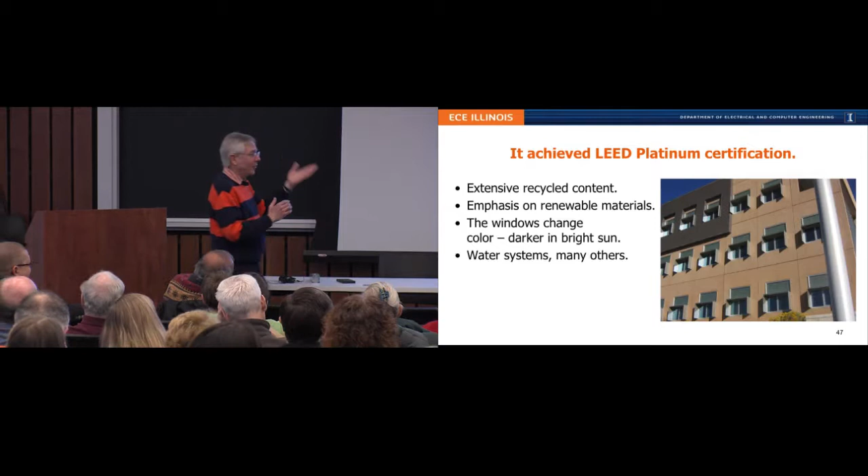Obviously, we're engineers. We're not going to let business people do better. But you can't do better than the best, so we have to go to zero net energy. That was our only choice. So we're pushing for that. But for example, what does that mean?

It's not just energy. It's also what did you build the building with? Is it recycled stuff? Did you generate very low waste when you put the building together? One thing that fascinates me is this building has a little bit of a new building smell, but you don't really smell paint and stuff like that. The new paints have almost no volatile content at all, much safer, dry faster, work better, horribly expensive. Whatever. Lots of water systems, water management is part of it, daylight management, all sorts of other things.

There are little stream beds under the ground around here all over the place. So yeah, you got to deal with that. It's not a good idea to build on quicksand.

We started again in January 2012 with the construction, not 08. I keep messing it up. And we did open for the fall semester.

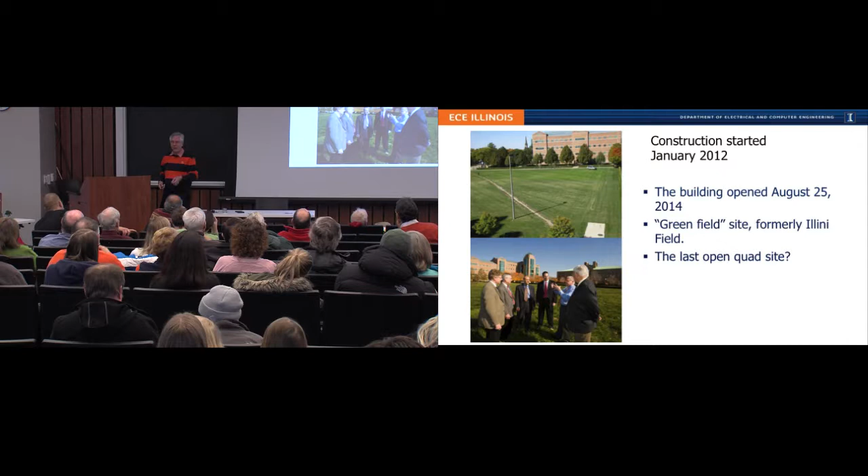This is about center field on the old baseball field. And even before that, Brad, you were trying to figure that out. Is this about the 30-yard line on the original football field? Well, of course, it's 30 yards wide, so it doesn't matter, right? I can say that and still be right. So anyway, there was a time when Red Grange was running through here carrying footballs.

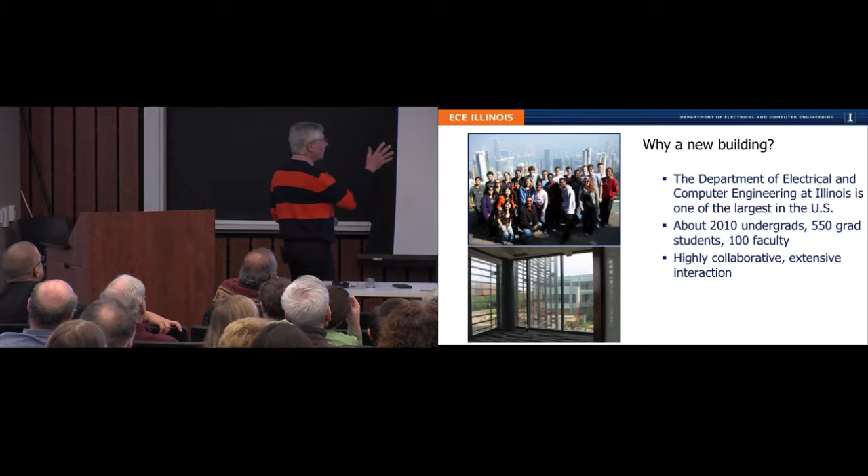Okay, why? This is just very quickly. Our department is actually one of the largest academic departments in the United States. More than 2,000 undergraduate students, more than 500 grad students, about 100 faculty. Whatever those numbers mean to you, this department has a wonderful sense of community and collaboration. We all know each other and interact with each other, and we can do lots more things because of our size than almost anybody else.

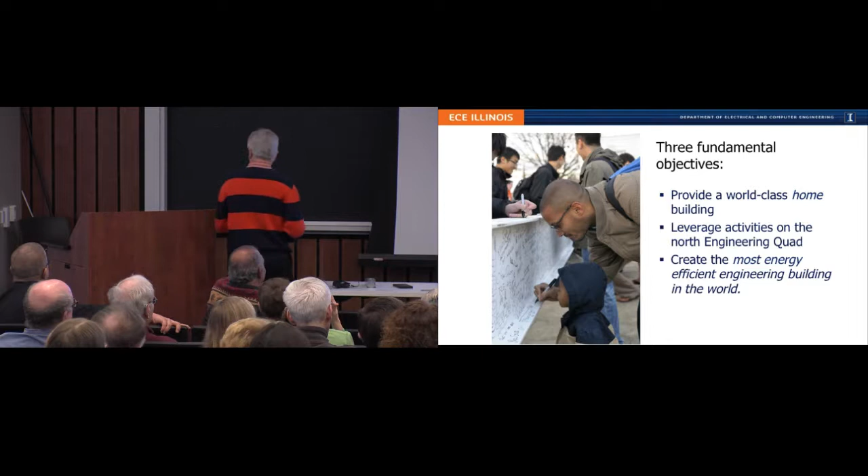So it's very good. We gave the architects 3 objectives. One is to provide a home for our students mainly, but for the rest of us as well. 2 is not to duplicate a lot of the stuff in the other buildings nearby. And 3, we challenged them to create the most energy efficient engineering building in the world. And in the end, they said, well, maybe we can go all the way to zero net. Okay, let's do that. We're still working on it, but it'll happen.

Lots of different things in this building. You're in the auditorium, but there's offices, there's teaching labs, there's research facilities, lots of classrooms. Everything you can imagine is in this building, I suppose, including the clean room out here.

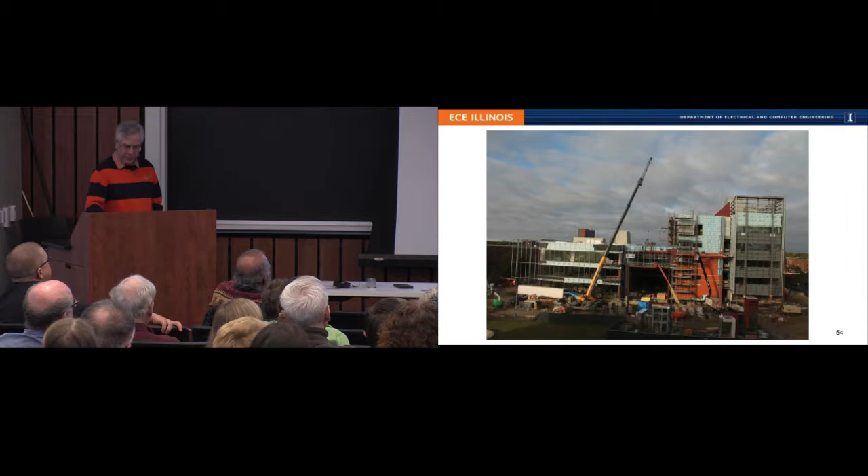There are about 24 different teaching labs in this building. Huge number, lots of places for students.

Okay, size. This building is about 236,000 square feet. Remember that great big one in Colorado was 330,000. Okay, it's bigger, not hugely, but it's bigger.

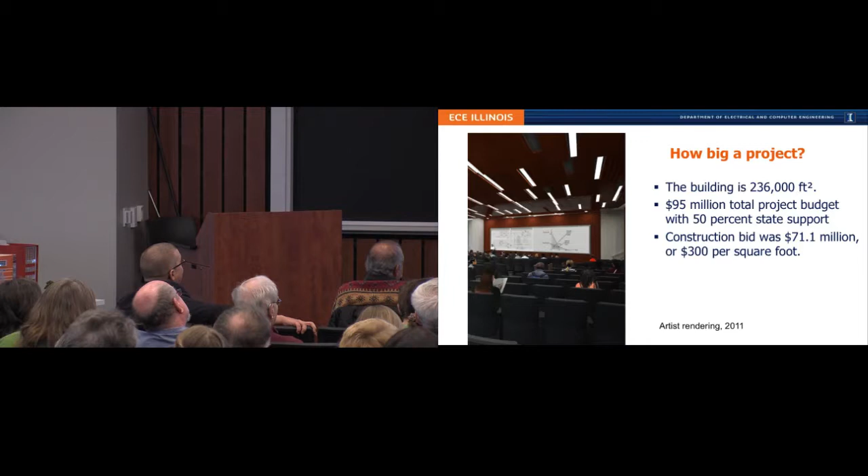The cost of the total budget was $95 million. Half of that came directly from the state as capital project support. I won't make snide remarks about Champaign Unit 4 and that number. Anyway, the construction bid was $71 million, which is right at $300 a square foot, which as an engineer makes you wonder about the construction people, because somebody knew how to divide, that's good. Anyway, that was considered good, you know, for a 100-year building with all these features, that's actually pretty good. Try to do a nice fancy building in downtown Chicago for $300 a square foot, good luck with that.

south tower down in here. There's this set of north towers with the labs and with the offices basically here.

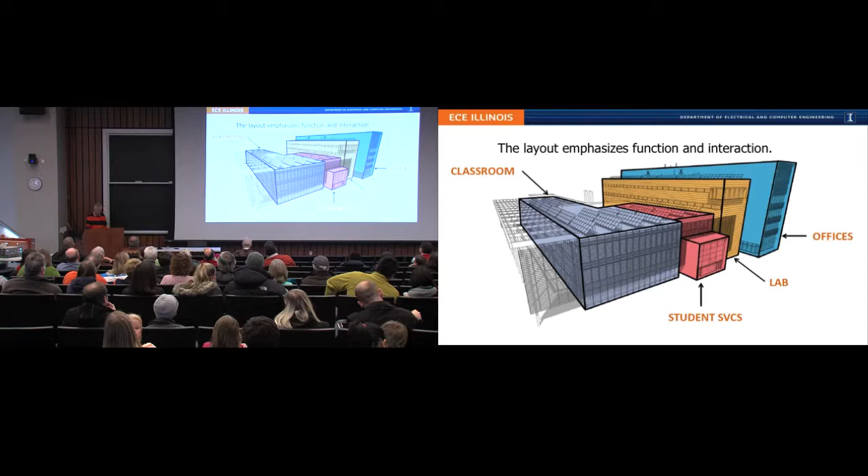And by the way, when we're done here, if you want to take a little bit of time and wander around, if anybody questions you, you can just tell them I said you could. It's all right, not a problem. The building is supposed to be public and open, right? We don't need all the layout, but here we are, right?

So a few photos showing how it came together. For example, everybody says, oh, my cell phone doesn't work in this building. We heard one go off, that's good. But most of them don't work, right?

Because everything's made of metal. All the floors are made of steel, all the walls are made of steel, even the windows, because they're special glass, have a metal coating. So in my office, my cell phone just dies. It doesn't work at all, okay? Down here, it's not as bad because there's more glass, but you get the idea.

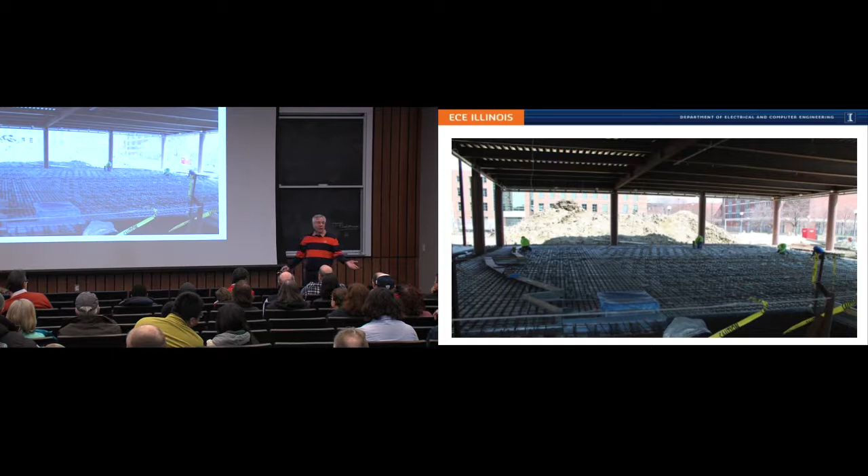Yeah, that's pretty good, huh? Okay, very low energy, very efficient, very effective in keeping the air fresh, and no noise. In fact, I could talk like this, and I'm sure I can get away with it. But I like to talk louder, so it's okay. Too many kids, right? I have too many kids.

How do we do the low energy? The walls are certainly part of it. The numbers, maybe they mean something to you, maybe not, but the walls in this building achieve R30, which is actually pretty good. There's a lot of passive solar design around to shade the building during the summertime and so on. Solid state lighting we talked about, but it's in 80% of the spaces, okay? And the rest of it is high-grade fluorescent.

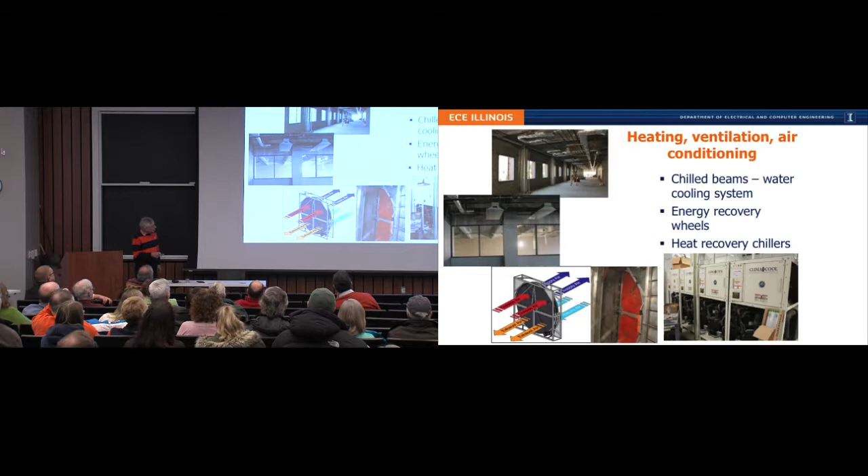The heating, ventilation, air conditioning I talked about. Here's a chilled beam. Here's the ventilation system interacting with it. And here are these exchange wheels. And then our heating system actually uses this weird chiller stuff. I won't mess with that.

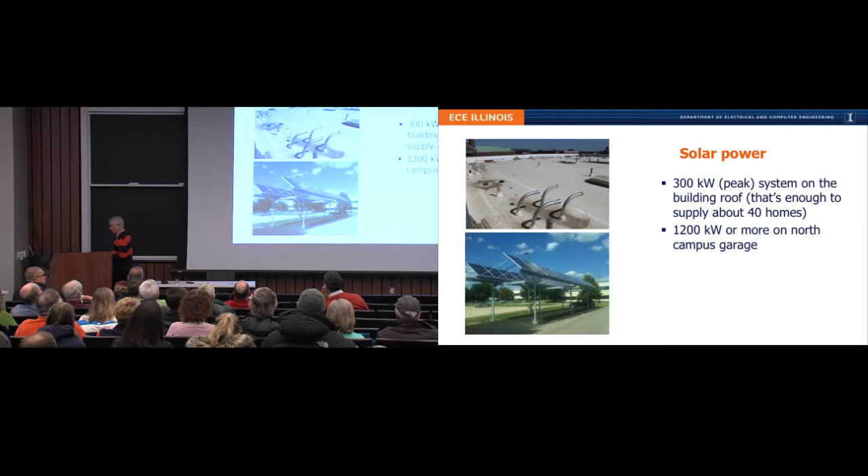And we're getting ready now to install the solar on the roof, because we got to have solar to get to zero net. Okay, our roof will hold about 300 kilowatts peak. That's roughly enough power to supply about 40 different houses. And then we're going to put more on the garage that's over here. And between those two, we should be good to go and hold ourselves up on the average over the year.

So we have a building now that can be a living lab and can help all of us figure out ways to do things in many different kinds of buildings, certainly this one, and other office buildings, other campus buildings, and so on. And again, the photograph and the rendering, okay? I got to get out there in the evening and get it with the lights on, right, so I can match it up. But we're very happy with this result.

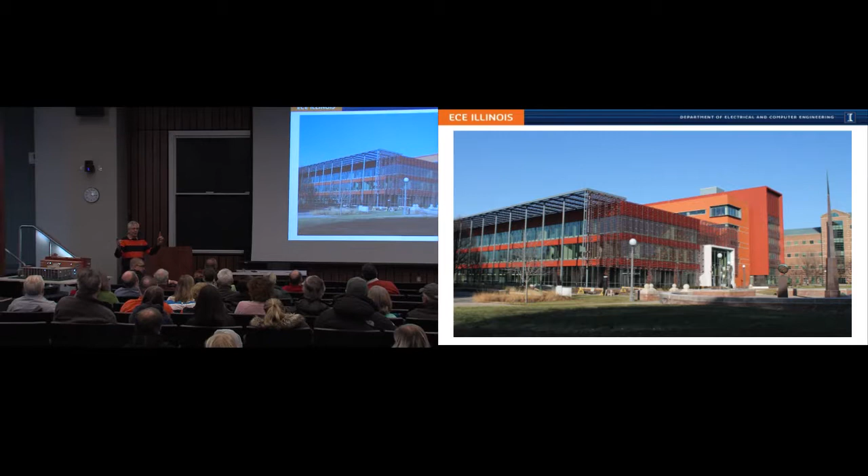I have this wonderful model here, and I would love to take your questions, right? I didn't emphasize this. The design engineering team is supposed to be able to justify and explain to you every single part in this building. Okay, if I ask the guy, why is there a bolt over there, he should be able to tell me.

Okay, now I can't, no one person can do that for every part of this building, right? And I'm part of what's called the user team, so I'll try my best. But thank you very much.

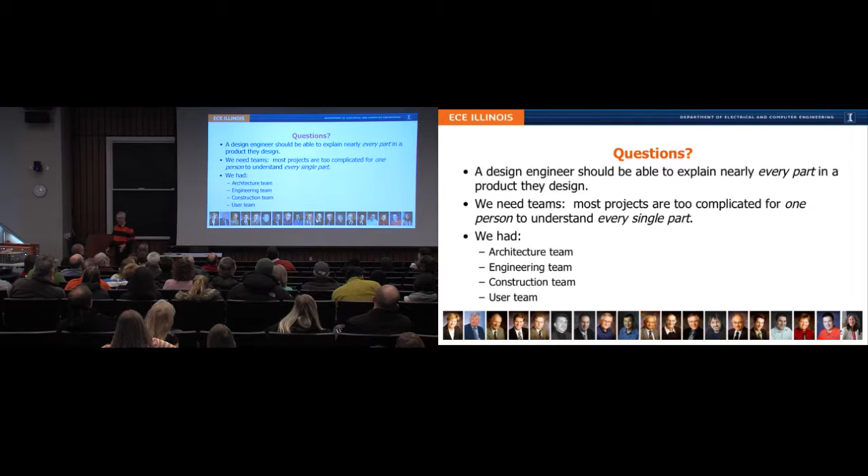You can ask anything. You mentioned buildings that can produce more energy than they use ultimately. If that went on for a long period of time, could that ever become a problem? So the question was, some buildings, like that house down there, can generate more energy than they actually use. If that became a real big trend, how would we deal with that, how would we manage it? In fact, that's a really important area of research right now.

It's how do you get enough control so that these things look like sort of conventional power plants. You can't make the electricity grid just be a backup. That's nonsense. The nuclear plant in Clinton, Illinois was not designed to be a backup power plant. It can't be, it never will be.

Worst case is we tell people to turn off if there's too much there. That's fine. Better case is you go get yourself a nice plug-in hybrid car, and charge it up with whatever you have as your excess energy, and go up to Door County and visit your neighbor's off-grid house.

All right, other questions? Well, on line to that question, isn't it also possible that you could sell the excess energy back to the company?